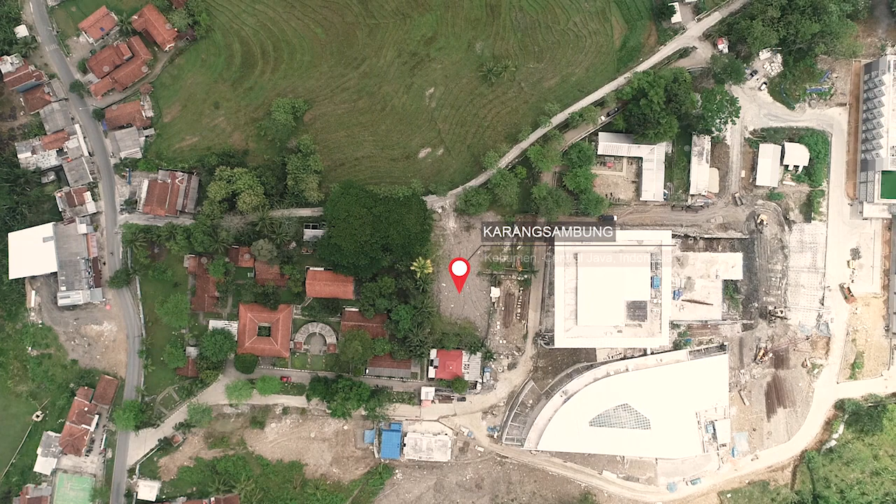One of Hutama Karya's projects is the Indonesian Geodiversity Area Project, located in Karangsambung, Kebumen, Indonesia. This educational building has three main buildings: the Geodiversity Building, the Geoconservation Building, and the Dormitory Building.

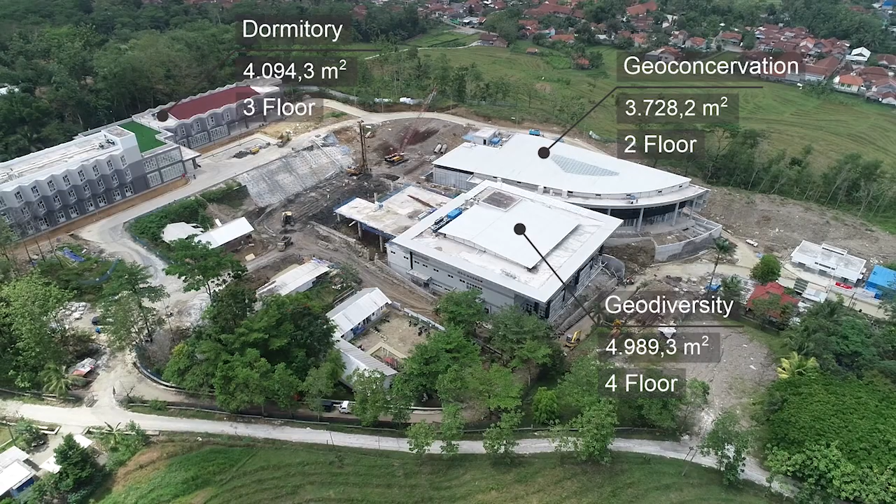In this project there are several challenges that we must solve, such as the project location in a mountainous area, difficult access to the project, time-consuming material mobilization, expansive soil, and owners who are in other provinces. This makes BIM a solution to solve the challenges of this project.

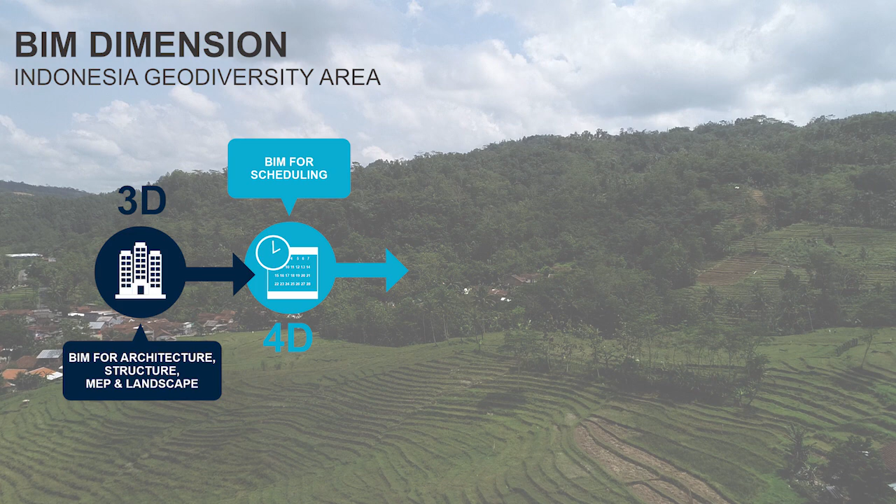In the application of BIM in the Indonesia Geodiversity Area Project, several dimensions are used: 3D BIM, which is used to create models and also clash detection, 4D BIM, which is used for progress animation, 5D for material takeoff, 6D for engineering analysis, and 7D for CDE and handover.

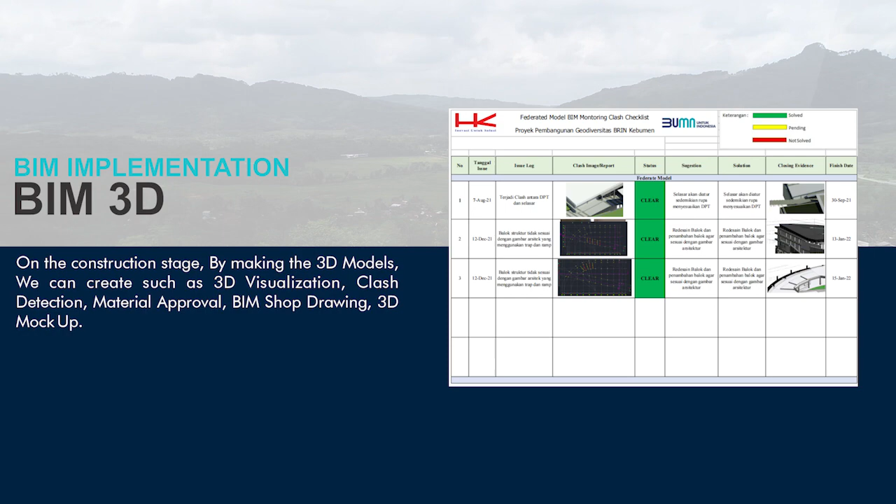In the construction stage, by making the 3D models, we can create 3D visualization, clash detection, material approval, BIM shop drawings, and 3D mock-up documents.

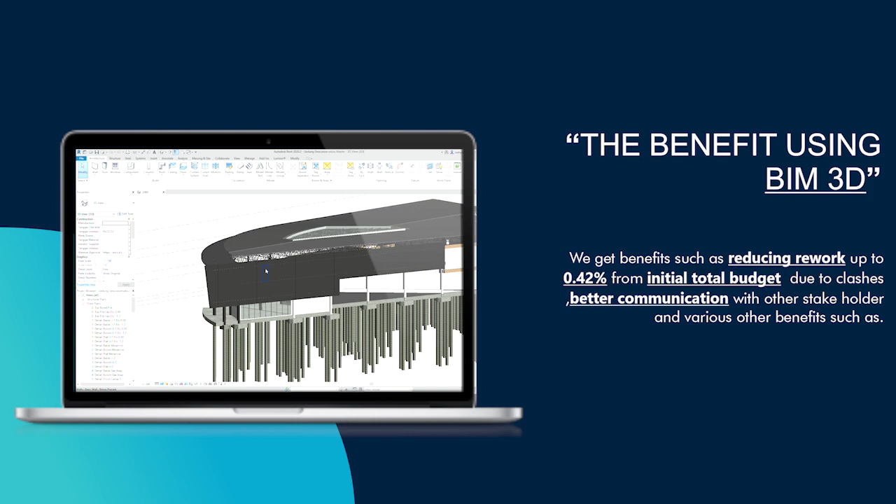The benefits of using 3D BIM include reducing rework due to clashes, better communication with other stakeholders like management, construction and the owner, and various other benefits such as shop drawing production speed increasing up to 150%, and material and shop drawing approval time of up to 1 week.

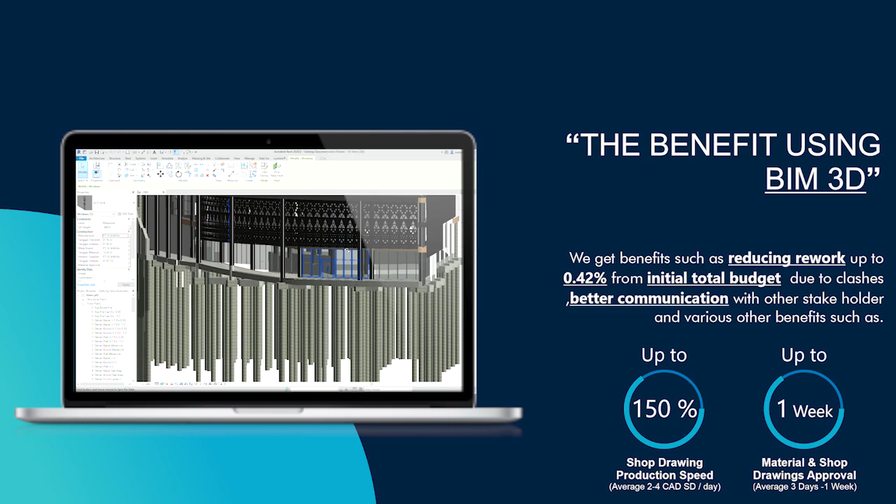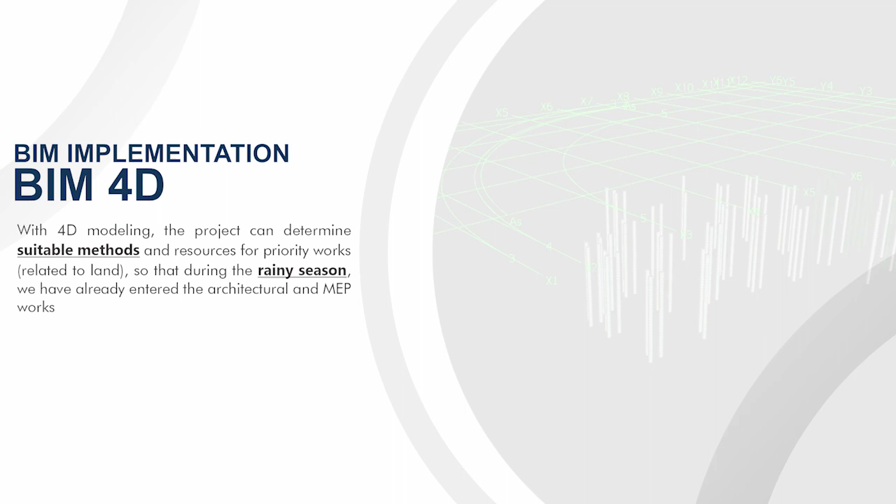BIM 4D will produce scheduling to control the construction progress to avoid project delay, so the project can determine suitable methods and resources for priority work, so that during the rainy season, we had already entered the architectural and MEP works. And we can save the duration of the project by up to 2 months.

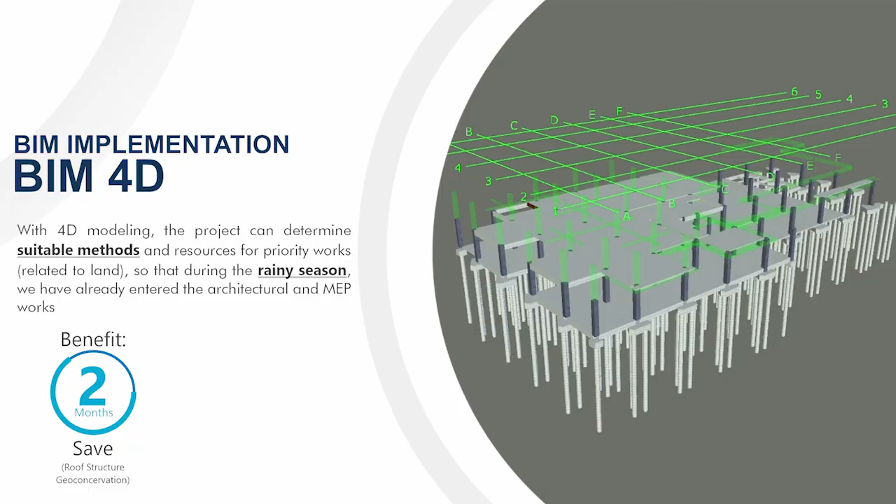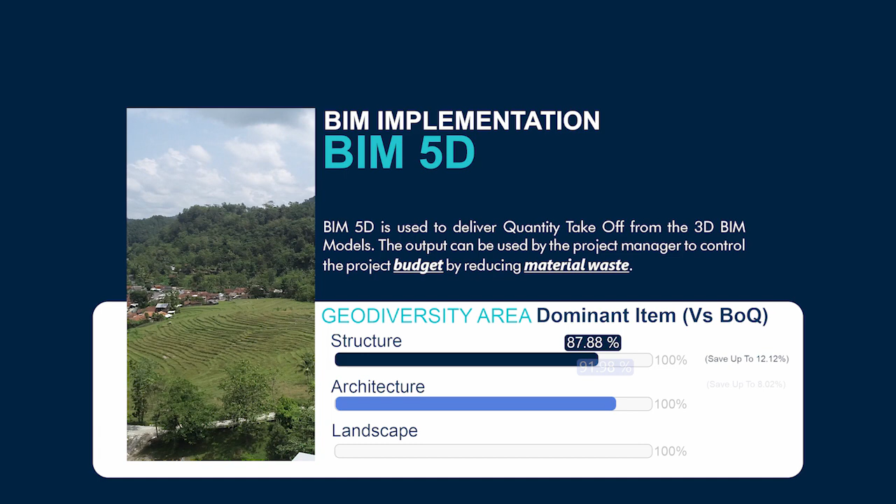BIM 5D output can be used by the project manager to control the project budget by reducing material waste. There is an efficiency of up to 12.12% in dominant structural work. As for the dominant architectural work, there is an efficiency of up to 8.02%, and for landscape there is an efficiency of up to 4.06%.

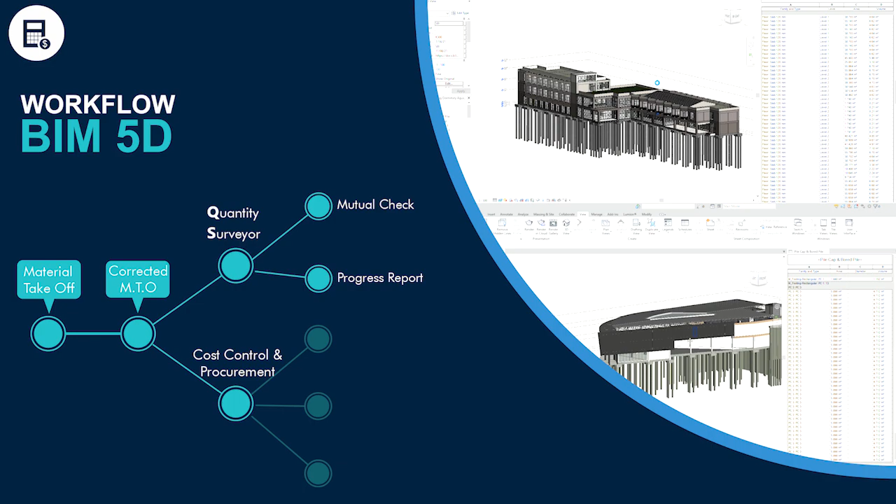The MTO produced by BIM is then corrected with the volume of BoQ and QS to determine the volume used. Then the results are sent to QS and also procurement or cost control. QS will produce mutual checks and progress reports. As for procurement or cost control, it will generate a list of pre-orders, invoices and claims.

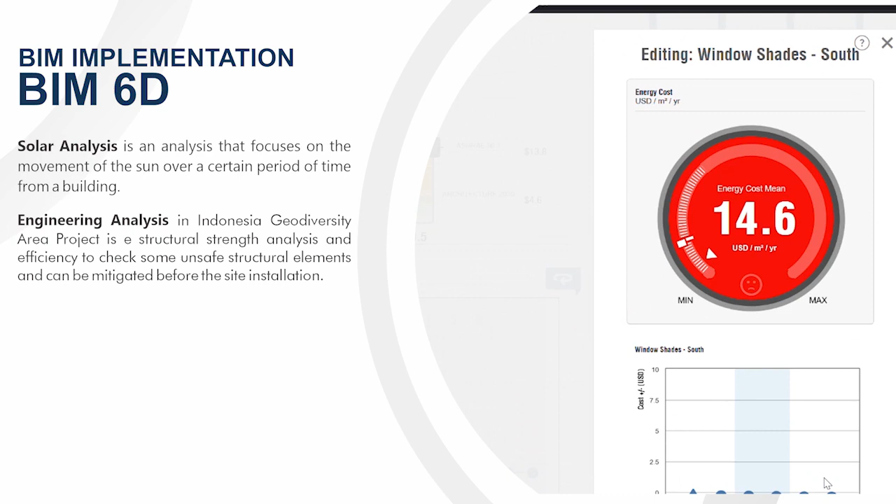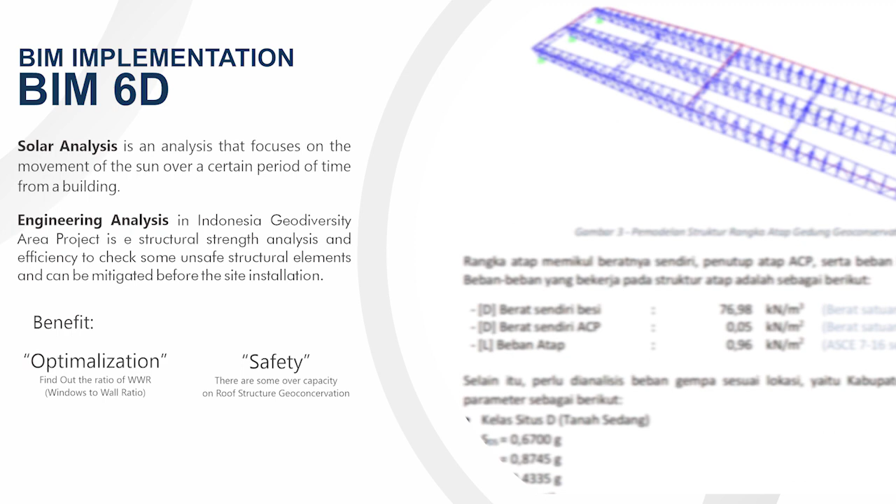In BIM 6D there are two analyses used: solar analysis and engineering analysis. Solar analysis is used to optimize the window-to-wall ratio to determine natural lighting and average electricity demand. Engineering analysis was carried out to check the strength of each structural element, and in checking the geoconservation roof, there were several elements that were overcapacity.

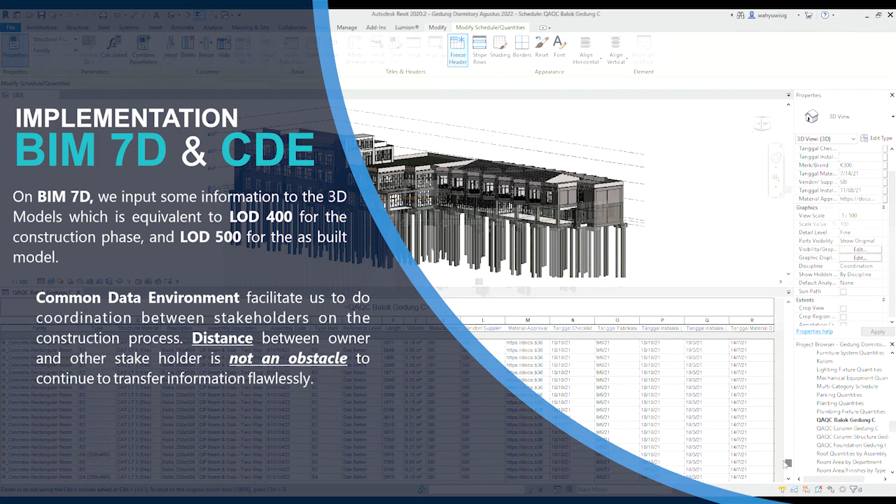In BIM 7D, we input information into the 3D models equivalent to LOD 400 for the construction phase, and LOD 500 for the as-built model. With CDE we can coordinate between stakeholders during the construction process. Distance between the owner and other stakeholders is not an obstacle to transferring information flawlessly.

We integrate our data as a digital twin in an online platform called GIS Dashboard. In this dashboard, stakeholders can monitor the project progress easily and do an online site visit, especially during the pandemic.

An internal web based on QR codes and embedded with BIM technology ensures that the process of exchanging information to the field does not experience distortion of information. Also, augmented reality is used to provide an overview of what the result of a building will look like.

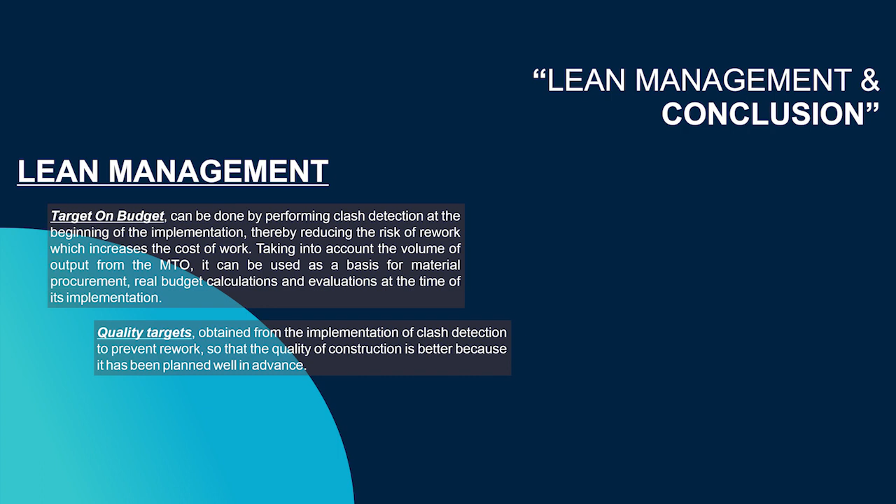The on-budget target can be achieved by performing clash detection at the beginning of the implementation, thereby reducing the risk of rework, which increases the cost of work. Quality targets are obtained from the implementation of clash detection to prevent rework. The on-time target must also consider the risk of clashes, which have the potential to increase time for work that has no effect on the main work.

Ease of submitting approval of materials, shop drawings, and supporting documents regardless of the distance between stakeholders. The selection of the most suitable work method gives a time efficiency of +2 months and an efficiency of the dominant item of 8.06%, and can save 0.42% of the total initial budget due to potential rework caused

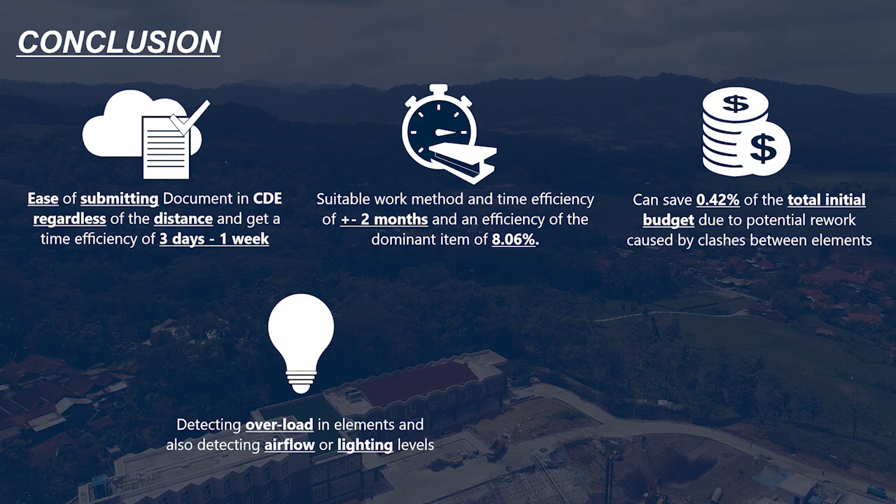by clashes between elements. It is capable of quickly detecting potential overload in elements and also detecting quality improvements such as airflow or lighting levels. Use of new methods or technologies such as QR codes reduces distortion of information so that work can be accelerated and waste such as paper waste is reduced.